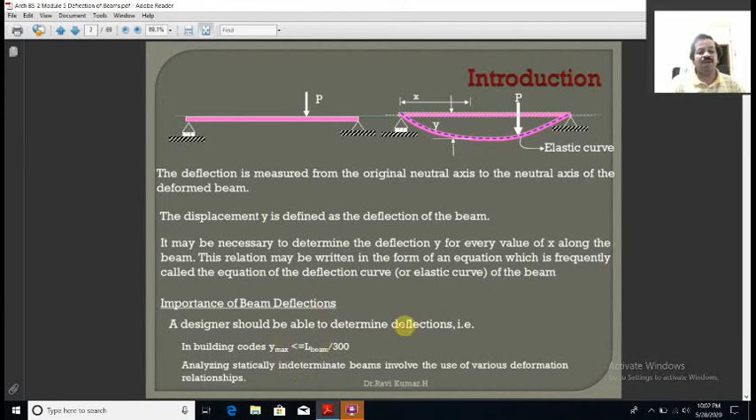After talking about what is meant by deflection, there are methods of determining deflection: the double integration method, the moment area method, and the Macaulay's method. But in our syllabus we have only the double integration method.

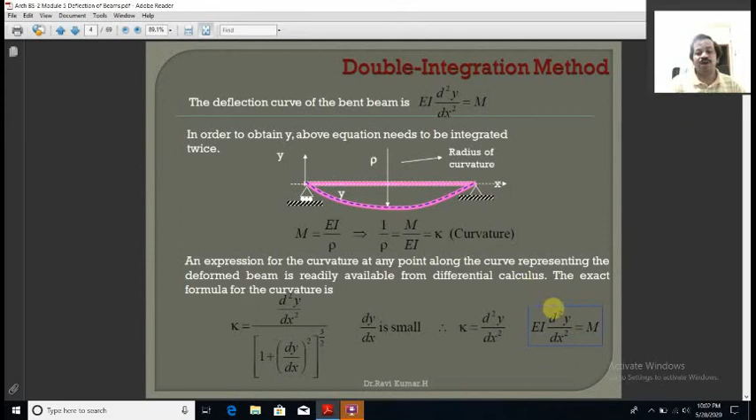Now what is the double integration method for deflection? The deflection curve of a beam, which we learned in module 4, follows Euler's differential equation: EI d square y by dx square is equal to M. This is called deflection, and this whole part is called Euler's differential equation. EI d square y by dx square equals Mx is called the differential equation of deflection.

With this, we integrate the first equation and get the slope equation. Once again, if I integrate the same equation, I get the deflection. Let us try to understand how we get this slope equation as well as the deflection equation through a small example.

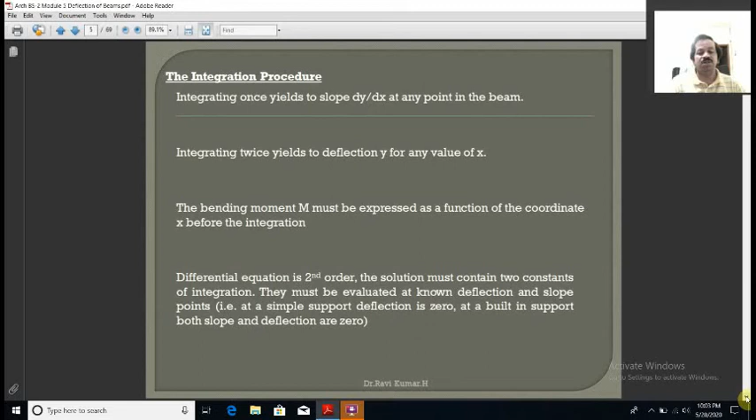But before that, we have to talk about sign conventions. What are the sign conventions? We say sagging moment is positive and hogging moment is negative.

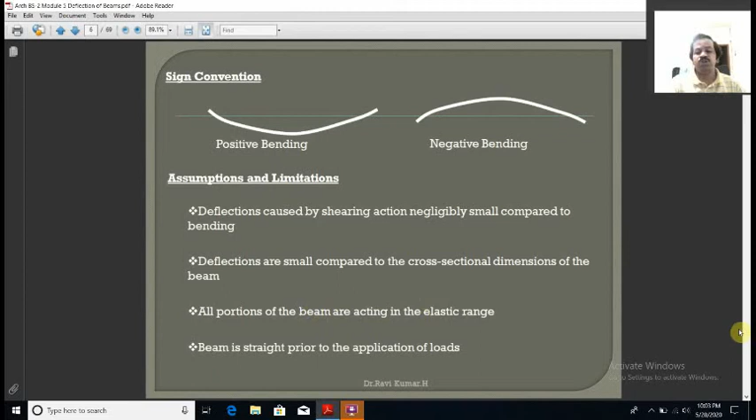The same with assumptions and limitations of deflection: deflection caused by shearing action is negligibly small compared to bending. Deflections are small compared to the cross-section dimension, hence it can be ignored. All portions of the beam act within the elastic range, and the beam is straight prior to the application of the loads.

So these are the assumptions and limitations, and this is the introduction to the chapter, where we talk about bending moment and shear force, and it's called the strength criteria as well as the stiffness criteria of a beam.

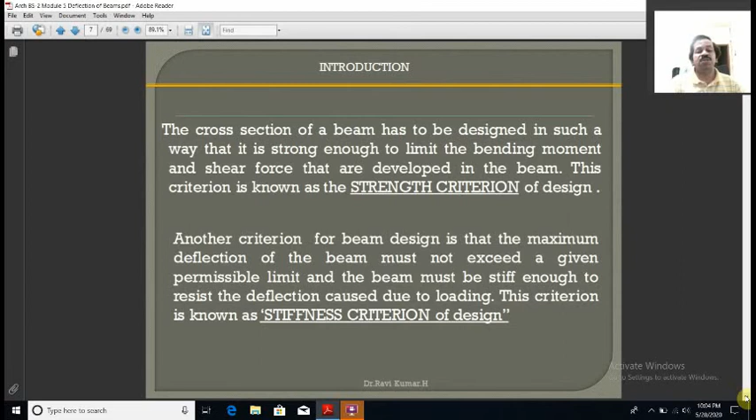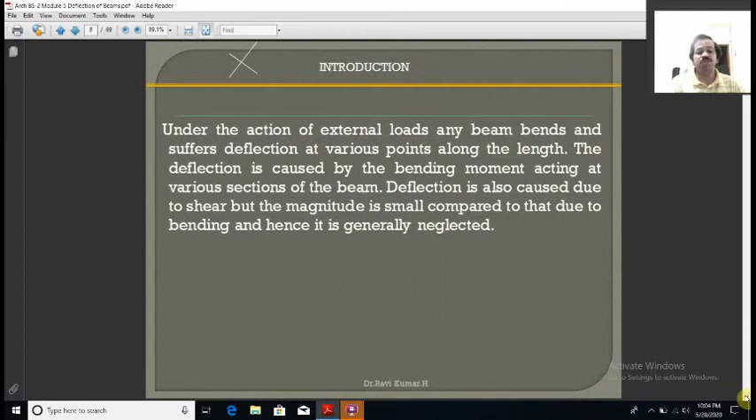Now, under the action of external loads, any beam bends and suffers deflection at various points along its length. The deflection is caused by the bending moment acting at various sections of the beam, and also by shear force, but its magnitude is very small compared to bending and hence can generally be neglected.

Let us now try to define what is meant by deflection as well as the elastic curve. The elastic curve is also called the deflection curve. The deflection is defined as the vertical distance in the transverse direction between corresponding positions of the axis before and after loading, at a section of the beam.

In the same way, the deformed shape of a beam is called an elastic curve or deflection curve. It can also be defined as the neutral axis in its deflected position after loading of the beam, known as the elastic curve or deflection curve.

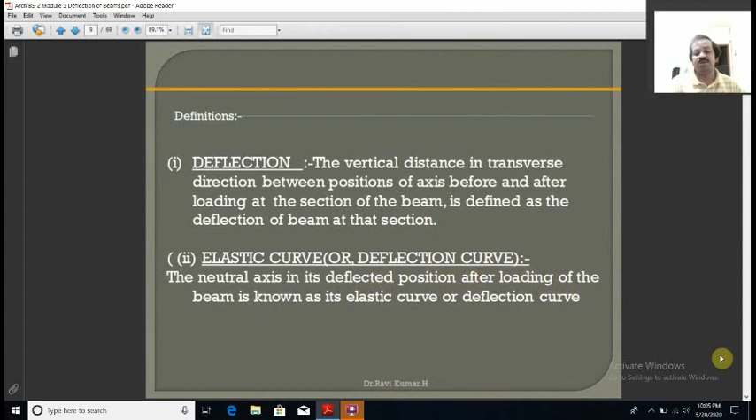As for the slope, the slope of a beam at any section is defined as the angle of inclination of the tangent drawn to that section of the axis in its deflected position after loading, measured with respect to the undeformed axis. I shall define this later through a numerical example of what is meant by slope.

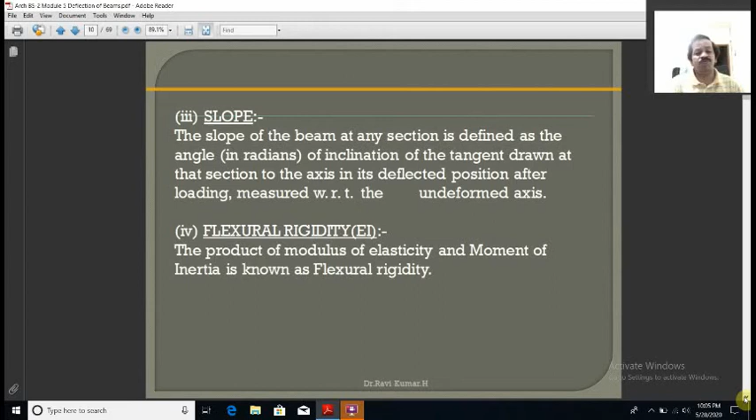The product of the modulus of elasticity and the moment of inertia is called flexural rigidity. Now coming to Euler's differential equation, we know this is the equation we have here, where EI is called the flexural rigidity and M is called the moment at a section.

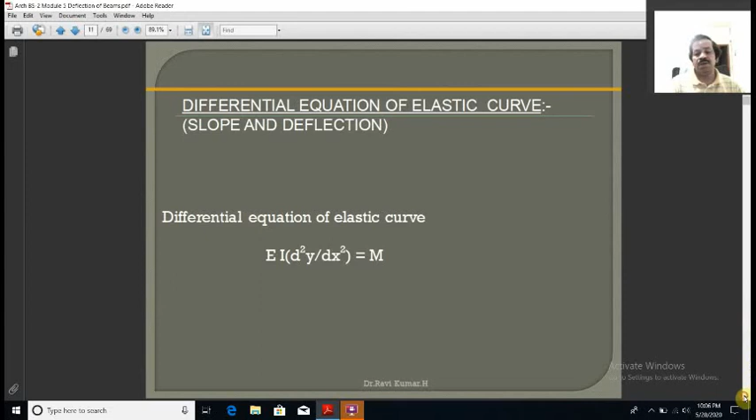Now when we do a derivation, we talk of assumptions made in the deflection. This will be asked for 5 marks in the examination for you.

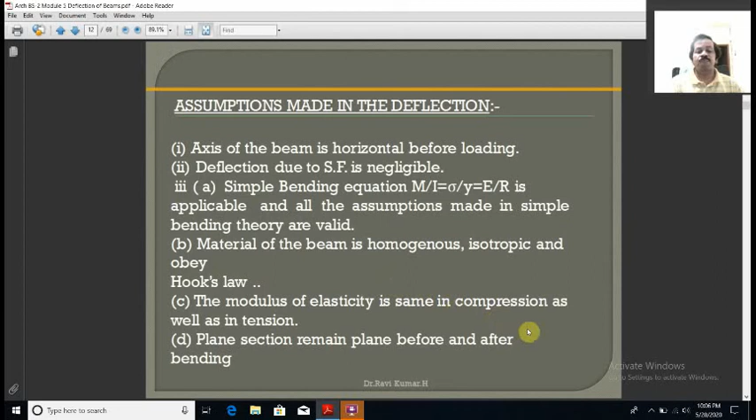So hence you have to define: the axis of beam is horizontal before the loading, due to the shear force is negligible, and simple bending equation M by I, which we learned in the third module, should be applicable here. Material of the beam is homogeneous, isotropic, and obeys Hooke's law. The modulus of elasticity is same in compression as well as in tension. Plane section remains plane before and after bending.

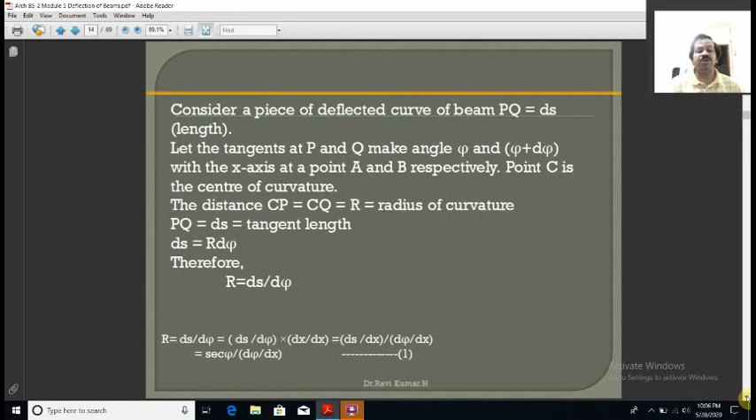So these are the assumptions to be stated in the problem. However, as part of the syllabus you don't have the derivation part. Anyhow, I have included in this slide how the derivation has come, so this you can skip it out.

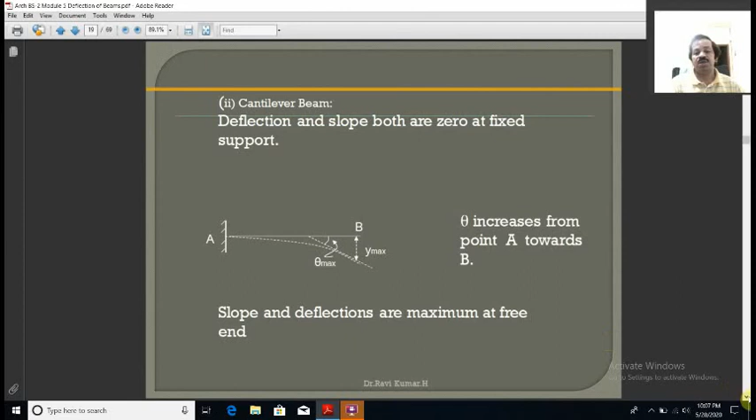So various methods of finding slope and deflection include the double integration method as well as Macaulay's method, which are in our syllabus. Now in the same regard, how do we get the slope as well as the deflection? The first step in the problem is to write the Euler's differential equation EI d squared y by dx squared equals M.

Now integrate this equation with respect to x. Hence EI dy by dx equals integral of M into dx plus C1, where C1 is called the constant of integration. In a similar way, once again integrate with respect to x on both sides, and we get C1 and C2, called constants of integration.

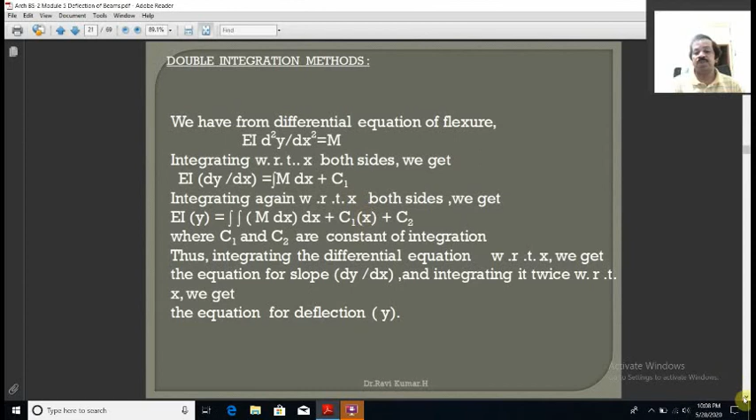This can be calculated or evaluated by applying the boundary conditions of a beam. Now what I told is that these are called the two constants of integration, which can be known by applying the conditions of deflection and slope at the supports.

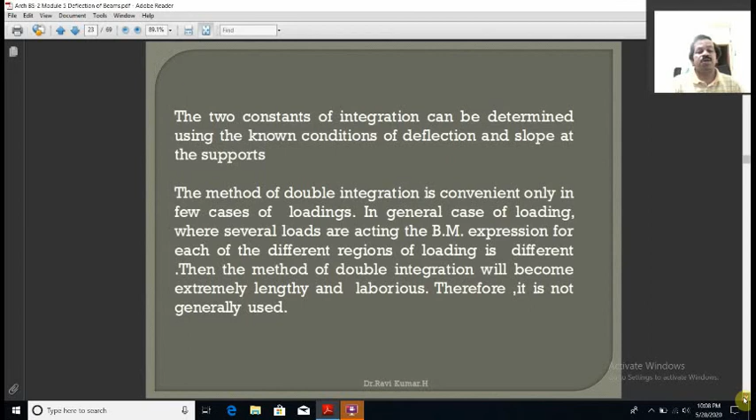Whenever a beam is subjected to a point load, it tries to bend; that is called the elastic curve. Coming to this elastic curve, the slope at this fixed end is 0 and the deflection is also 0. In the same way, at the free end, the deflection is maximum as well as the slope is also maximum. Now how do I write the bending equation here?

So this is a problem where your job is to work out the deflection when a point load of 6 kilonewton is applied, with the length of the member being 3 meters, Young's modulus given, and I given. First we'll write down the equation for bending moment.

As we know, hogging bending moment is negative, hence moment equals force into perpendicular distance. Hence P into X is written here.

So in this regard the Euler's differential equation EI d squared y by dx squared is written as M, and M equals P into X, negative due to the hogging bending moment. Now this is equation number 1.

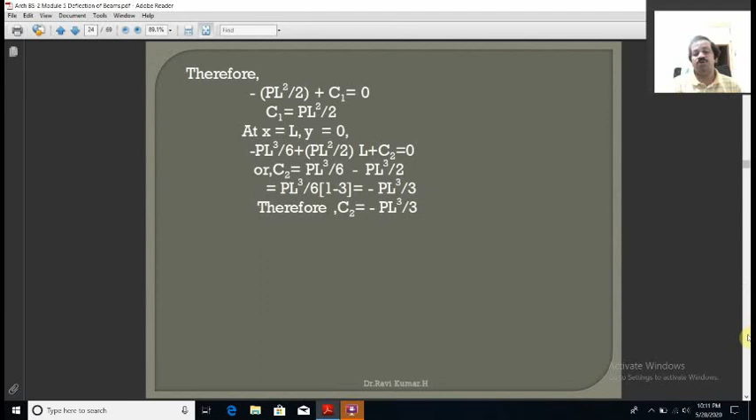Now substitute these values of C1 and C2 in the equation, and when we get the equation at x equal to 0, we have the maximum equation, that is the maximum slope and the maximum deflection. Hence we get PL cubed by 3EI, as well as the slope equal to PL squared by 2EI.

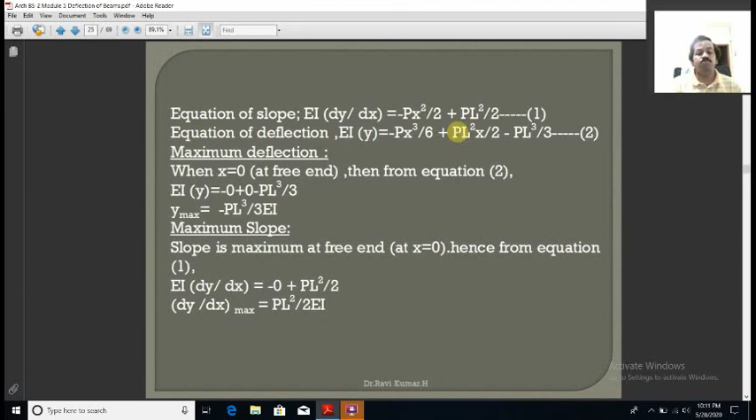That means to say in the problem, I'll just show you the pictorial representation. So here at x equal to L, the slope is 0 and the deflection is 0. At x equal to 0, you have a maximum deflection and the maximum slope in the problem.

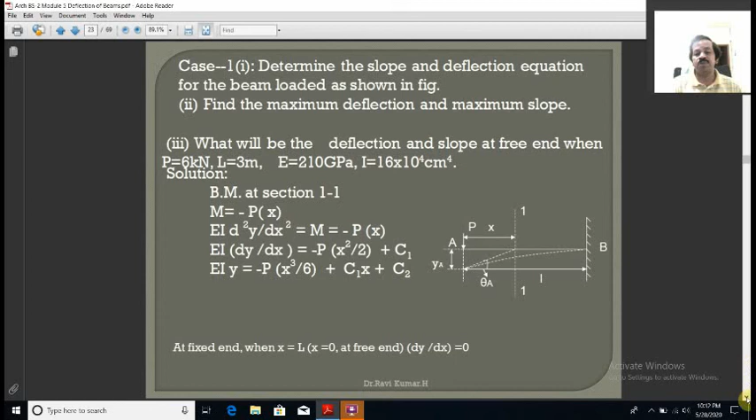So that's what is substituted here. Based on that, you'll be getting the two constants of integration, and then you substitute in the equation and you'll get the slope is equal to PL square by 2EI.

Substitute the value of P and L given in the problem, 2EI and do the conversion. It was given as 6 kilonewton, so convert into Newton: 6 into 10 cube into L. L was given as 3 meters, convert into mm, hence 3 into 10 cube square divided by 2 into the flexural rigidity EI. Young's modulus is given as E. Substitute that, we'll be getting 8.0357 into 10 raised to minus 5 radian.

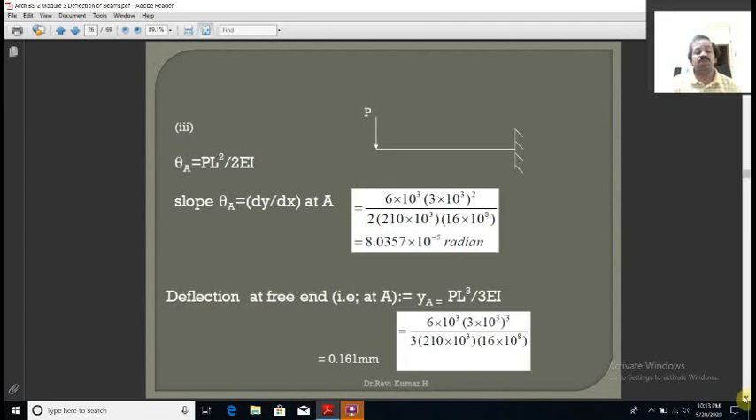The same way, we'll talk about the substitution for deflection. Calculate that as 0.161 in the equation. So this problem is an application to the cantilever beam subject to a point load.

The same way, we have another problem when the cantilever is subject to a uniformly distributed load for the entire span, and A is taken as the origin. Take A as section XX, distance X from A. Now, the moment at a distance X from A, when I take a section, is W into X by 2, hence I get Wx squared by 2 in this problem. As it is a hogging moment, it is minus. Hence substitute that, Mx is equal to Wx squared by 2.

Now you integrate this equation. I'll be getting Wx cubed by 6 plus C1 in this problem.

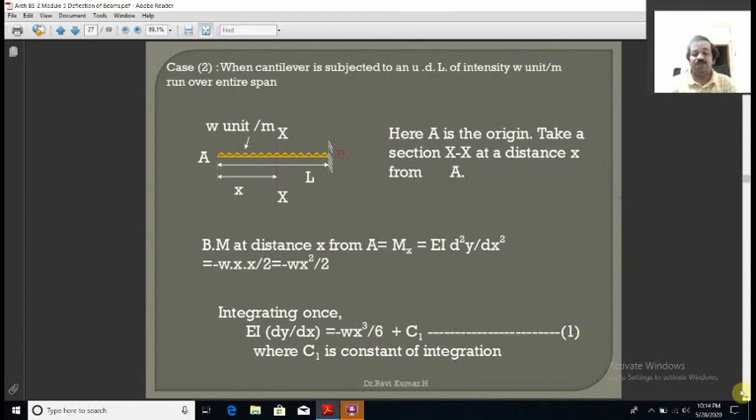In a similar way, we'll apply the boundary conditions: at x equal to L, the slope is 0 at that point, meaning at the support the slope is 0 in case of a cantilever beam. Hence substitute that, and the same way the deflection is also 0 at the support, so you'll get the values of C1 and C2 in this problem.

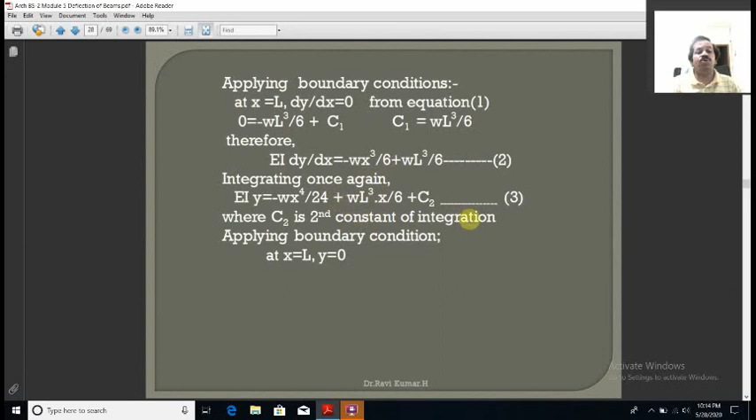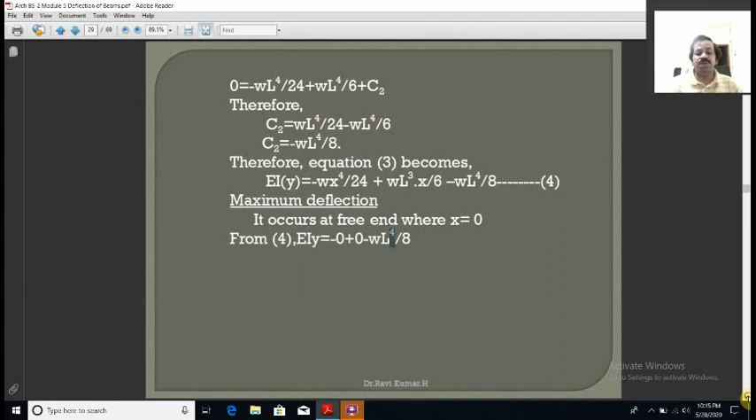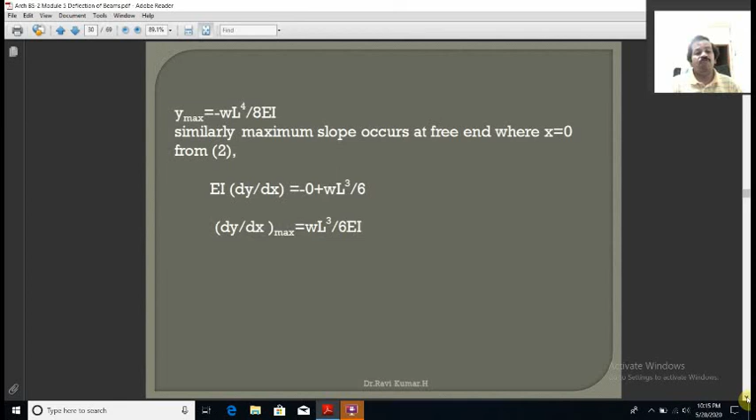If numerical values are given for W and L, you can substitute in the equation and calculate the maximum deflection. So this problem is an application to a cantilever beam subjected to a uniformly distributed load, and we found out the slope and deflection here. This is the equation, so this is the method of working out a numerical problem with a cantilever beam subjected to a point load as well as a UDL.

Now coming to the last problem for the day, case number 3: when a simply supported beam is subjected to a single point load at mid-span, the reaction at the two supports will be half of that load, hence P by 2. If I take a section here, P by 2 into X is the moment. Hence it is written, moment is equal to P by 2 into X.

Now write down Euler's deflection equation, EI d square y by dx square is P by 2 into X. Now integrate this equation. When I integrate, I get P by 2 x square by 2 plus C1.

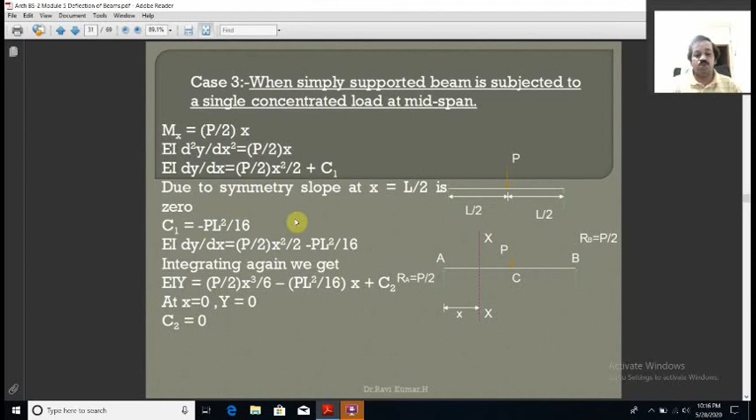Due to symmetry, at x equal to L by 2, at this point of maximum deflection, the slope is 0. Substitute that here and find the constants C1 and C2 in the equation. When I substitute, I get C2 equal to 0 and C1 equal to minus PL squared by 16. So with that, you've got C1 and C2 in this problem.

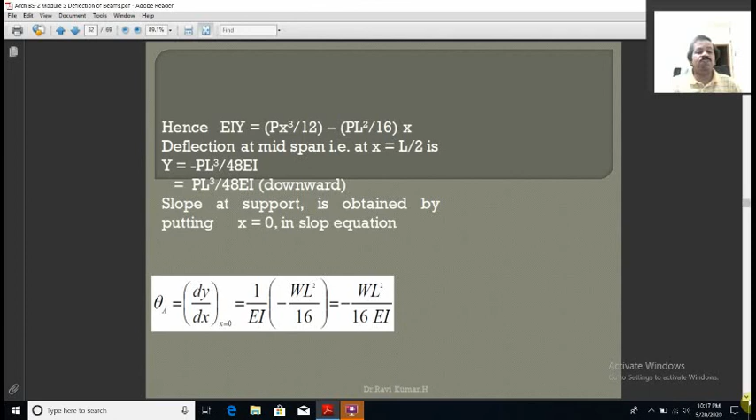Substitute that, and once you get C1 and C2, you get the maximum deflection equal to PL cube by 48 EI, as well as the maximum slope equal to PL square by 16 EI. So such problems, derivation subject to point load, we have done today: a point load problem for a cantilever beam, a uniformly distributed load for a cantilever beam, as well as a point load for a simply supported beam problem.

So this is the next problem we shall discuss in the next class. I'll end today's lecture on understanding the problem.